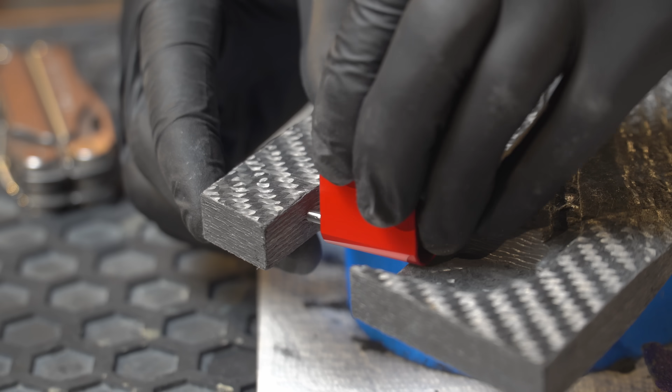The control tabs are made of anodized aluminum and they're driven by MKS 6160 high-torque servos. These slim servos are embedded inside the fin, which is made of solid carbon fiber. The pockets are then potted in epoxy to smooth out the outer mold line, and then the fins are attached and filleted to the body tube.

The fins were cut out using the Carbide 3D Shapeoko router, but before we get into more details, this video is the beginning of No Effort November, a month during which I put no effort into making videos. I got this idea from Technology Connections, one of my favorite channels, and I think it's a great reminder that you can put whatever you want on this platform.

And what I want to put on this platform is a long technical deep dive into how I made this rocket airframe. So let's start at the beginning.

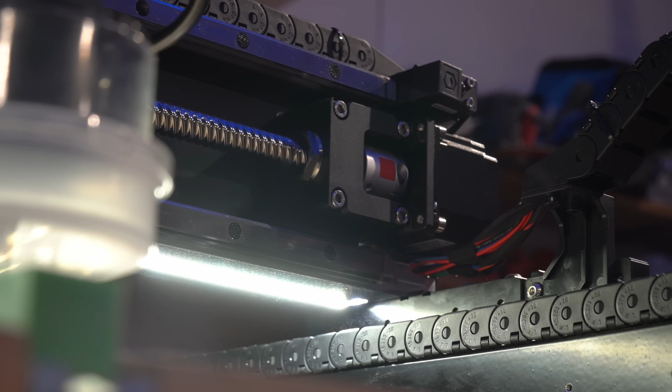Before cutting the fins out in carbon fiber, I started with wood, specifically birch because it's so cheap. The carbon fiber that the fins will eventually be made of is very expensive for reasons we'll cover later, and birch provides a great way to test out my tool paths.

The path uses 2D adaptive clearing for the servo pockets and shallow contour passes for everything else. On the first test cut, I included the leading edge chamfer on one side, but this presents a problem. How do we get the chamfer on the other side of the fin?

My initial plan was to mill all 4 fins at once, flip the entire stock material upside down, re-index it, and then mill the other side. But then my buddy Winston Moy had a better idea.

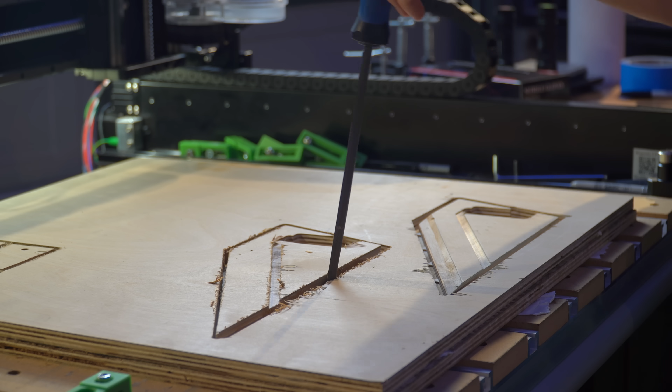I cut out the fin using the same strategies as before, but left off the leading edge chamfer. On the other side of the machine, I set up a fence and indexed the fin against it using a piece of stock material as a spacer. This should let us get consistent x-axis placement, which is important to determining where the leading edge chamfer is.

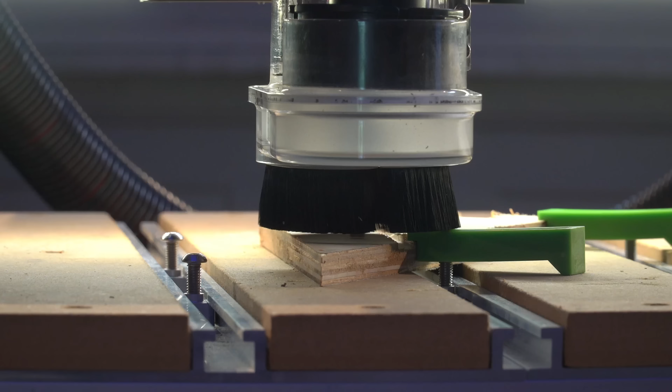Then I ran a parallel tool path to create that chamfer and flipped the fin to do the other side using the same path. This creates a consistent chamfer across any fin that we align to this fence.

With the tool paths complete, you'd think it'd be time to make the fins, but it's not. It's time to test the servos.

The servos I'm using here are MKS 6160s. For the amount of torque they put out, these things are relatively slim, and they're designed this way to fit inside the wing of a UAV, which we're kind of doing. Like, in a sense, a rocket is a UAV, and in a sense, a fin is a wing.

The servos claim they can do 18.6 kilograms per centimeter of torque, which is a ridiculous measurement for torque, but let's just roll with it. 18.6 is an impressive claim. The distance between the center spline and the actuation point is about 9 millimeters.

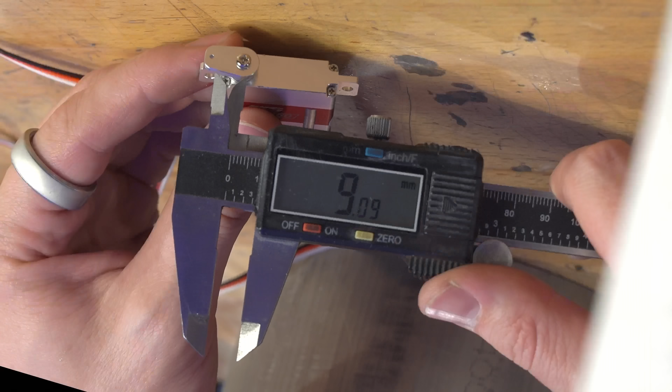Mounting this servo in a vise with a crane scale and some ratchet straps, I set about to find out if that was true. I would like to learn 2 things: 1, what is the maximum torque of the servo? And 2, when we exceed that max torque, what happens?

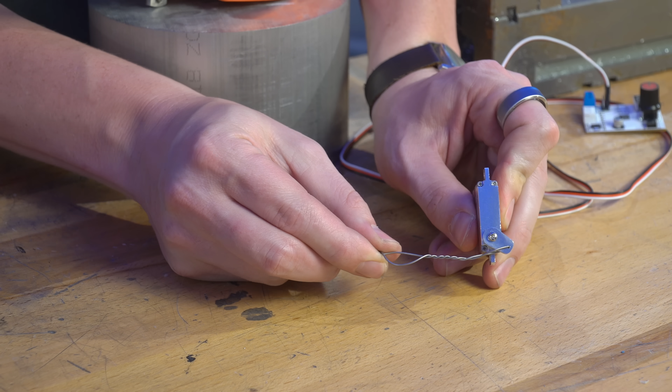Is this test a little overkill? No. Usually I'd say yes, but absolutely not. We're putting 40 pounds of rocket propellant into this thing. It is an enormous vehicle. It is fully guiding itself. It needs to be fully in control, and we're trying to prove out tech for the space shot. I need to be doing this at the level of risk tolerance that I'm going to be using for an 8-inch rocket. For what it's worth, a 4-inch rocket will kill me just as good as an 8-inch. I mean, you can get killed by an Estes-like park flyer, but the secret goal of the meat rocket is to show that I'm ready to build something much larger.

So let's test this thing. With the initial testing, I held the servo down at its center point and started ratcheting down the ratchet strap. I was able to get some pretty incredible values for this.

The units on the crane scale are in newtons, and it got to the point where the force started unwinding the steel cable attached to the servo. With this style of testing, I found the maximum resistance to be somewhere around 650 newtons.

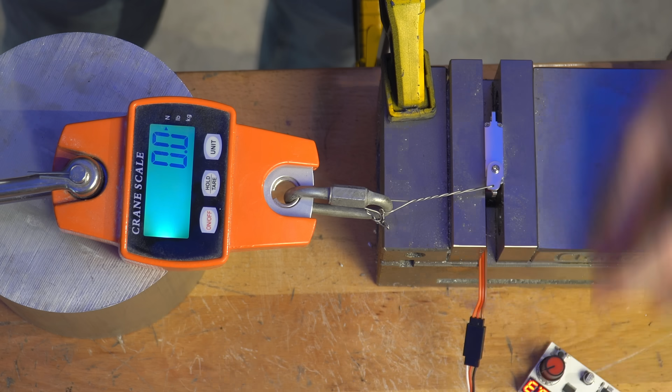So it will really hold that position for a long time. And if I let it go, it does seem to lose a little position. Like, that is not the center I was looking for. This is almost 60 kilogram-centimeters, which way outperforms the spec.

But the servo clearly slips during this process, and it seems like what I'm actually doing here is just bending the metal of the gear train itself. Eventually, when I tried pulling again, I did strip the gear train entirely. Oh, that broke something. Yeah, there we go.

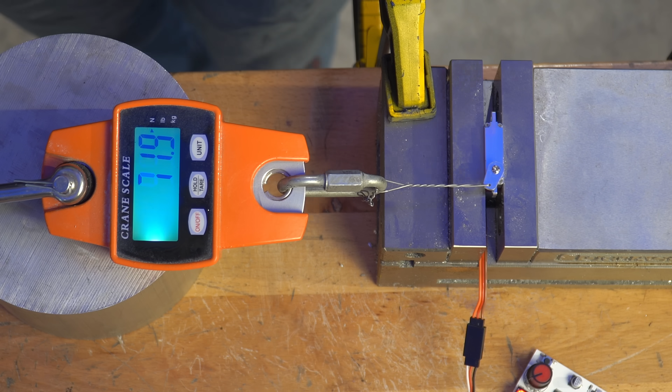I then ran testing where I attempted to move the servo under load. This yielded some less encouraging results. The servo can withstand enormous static load, far beyond the spec, but I did notice that when trying to move the servo under load, I was getting below the spec. The numbers I was getting were somewhere closer to 11 kilogram-centimeters instead of 18.6, which is a stark difference.

All right, gang, new idea just dropped. This is like a shaker.

Sometimes we desire more performance out of our devices than they are willing to give us, and they need a little convincing. Sometimes that convincing comes in the form of more volts. The servo I am using is rated to 8.4 volts. That's a 2-cell LiPo. This is a 3-cell LiPo, which brings us up to 11.1. That's higher than the servo wants to be at.

And yes, I hear you asking, Joe, do you really think it's a good idea to overvolt your servos in such a high-stakes environment? To which I would say, shut up. Let me make this mistake. I know it's not a great idea, but consider the following. I really want to do it.

All right, let's feed this 11 volts and see what happens. 231, 211, 200. Servo's a little hot. Wow, dude, the overvolting is great. This is excellent. What could possibly go wrong?

The servo didn't die using 3 cells, so naturally, because we're testing to failure here, I went up to 4 cells. 217. Oh, that's it. There's the smoke. The servo did not like 4 cells, which makes sense given that's double the rated voltage.

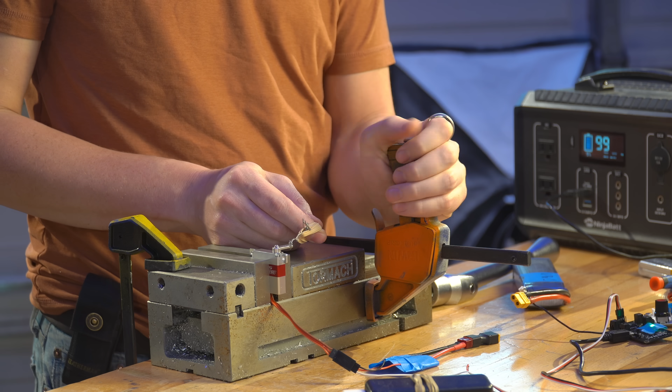The next test I ran was a runtime test. Using a program on an old single-board computer, I drove the servo back and forth under a little bit of load from a rubber band for as long as it would go for. Using the overvolted 3-cell method, I was only able to get about 4 minutes of life out of the servo before it started slipping and dying, and when I ran the servo at the proper voltage, I was able to get about 17 or 18 minutes before the servo died.

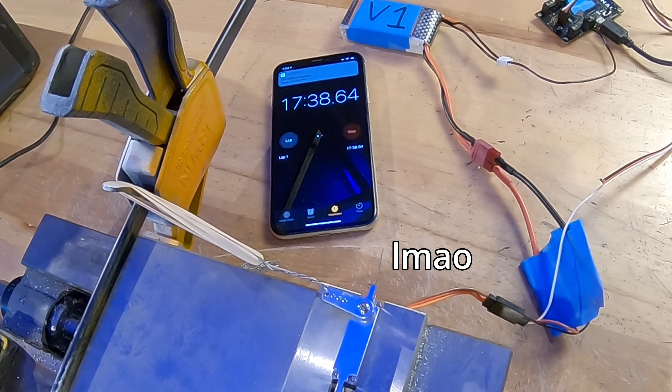This prompted me to do one of my favorite things, which is cold call the company I'm interested in. I found a customer support number for MKS servos and spent a little while on the phone with them. When I asked them why their servos weren't delivering the stated torque on the packaging, they said something to the effect of, 'What are you gonna do? We gotta sell servos.' And it's like, what are you gonna do? Don't lie about the torque.

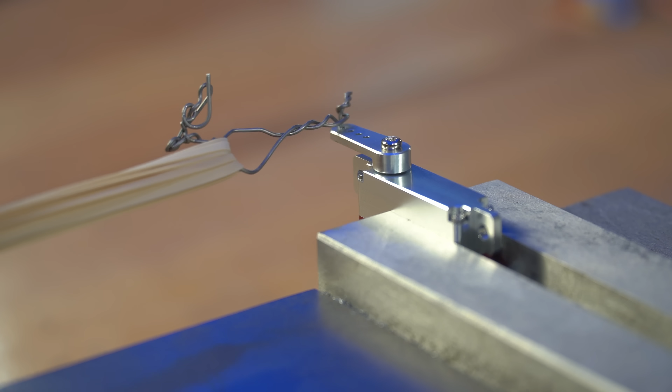For what it's worth, they were really nice on the phone, and the call yielded a much more detailed spec sheet that gave me an idea of where and how I can expect the servos to fail over time.

With a coreless servo like this, heat is going to be the thing that kills it, specifically heat within the motor. So constantly cycling it back and forth has a pretty high chance of burning it out, but intermittent movement or movement over the course of a flight profile like I'm going to do shouldn't be a problem.

All that information is good enough for me to move forward here. In flight, we're going to operate with 2 cells like the servo wants, and we'll design the control system such that it doesn't demand more torque than the servo can actually do, not what it states on the package.

I want to press pause here and back up a little bit. I haven't talked much about the fin tab sizing, the nose cone shape, any of the GNC analysis, and all of that is really heavy simulation work, specifically stuff with CFD, or fluid dynamic simulation.

Up until now, I've been doing that simulation on an old laptop from 2020, and this approach works great if you don't have deadlines and don't care that it takes multiple hours to run a single sim.

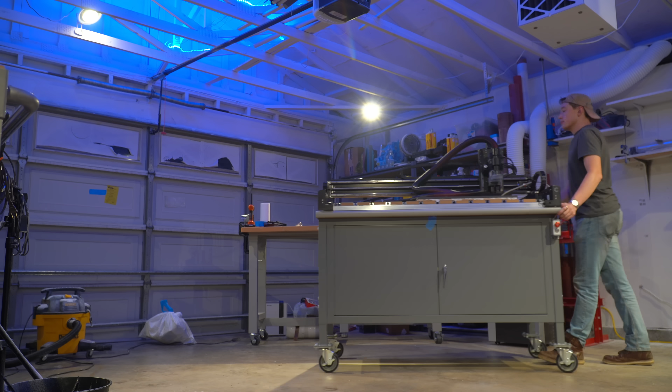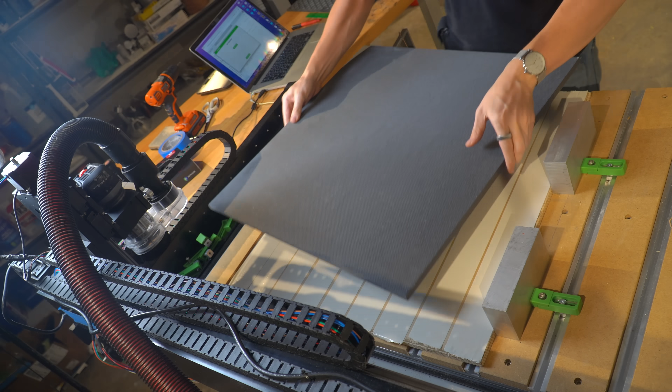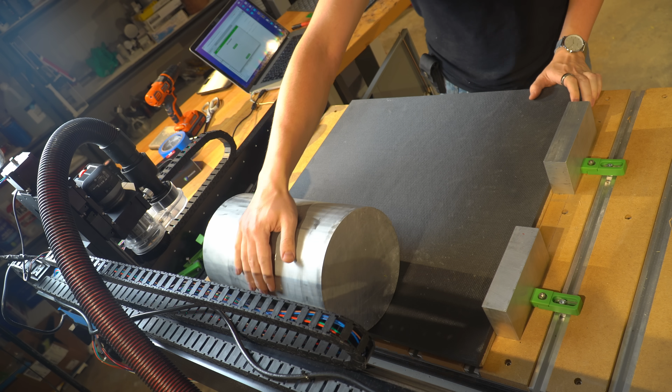With the servos done, it's time to cut out these fins. I secured the stock material to the table using X-Fasten double-sided woodworking tape. I used a birch wasteboard under the carbon fiber and smoothed it out using this comically large 8-inch piece of stock material, and the carbon fiber goes on top using the same double-sided tape method. This stuff is half-inch thick, quasi-isotropic DragonPlate. DragonPlate is expensive, but it is really good. I could have laid up my own carbon fiber sheets for this, but I opted not to because I want the absolute best chance that these fins don't flutter themselves to pieces at Mach 3. There's a lot of unsupported area near the servo, and unfortunately, an $800 sheet of carbon fiber is kind of a drop in the bucket for a project like this. The sheet is also quasi-isotropic, which means they put the layers down in alternating directions, and that helps with strength overall.

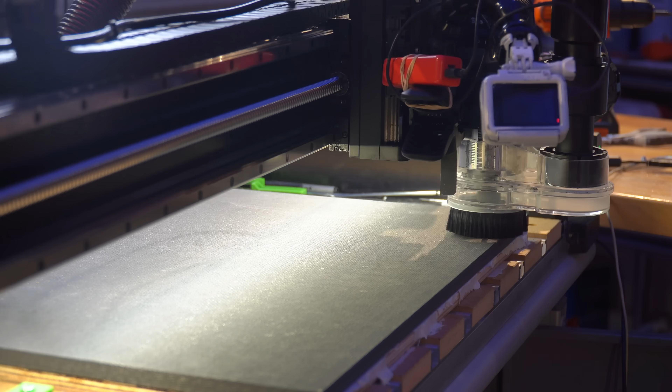Carbon fiber is worse for you than asbestos. It's so bad, so I'm using a HEPA filter bag in the shop vac, and the CNC machine has a dust boot on it to make sure that it sucks up as much as possible. But in addition, I'm also wearing a respirator and eye protection and usually some form of gloves as well. The dust here is so bad for you that some people cut carbon fiber underwater. I'm not going that far. The dust boot and a HEPA filter and a respirator and eye protection is probably enough, but you don't want to breathe it in.

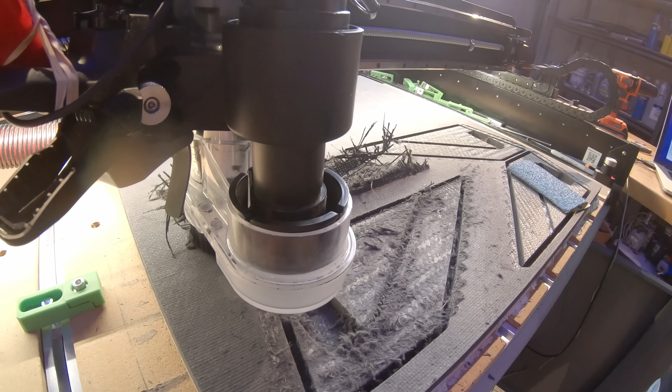I'm cutting this using a flat carbide quarter-inch end mill. With carbon fiber, you should really be using diamond tip stuff, something that will maintain its sharpness, because carbon fiber wears it down quite fast. I did buy the right cutter for this, but it did not show up in time and I was getting impatient, so I cut the fins this way. The wear on the tool over time becomes clear. The first fin cuts out all right with a little bit of fraying. The second fin gets much more fraying on the contouring pass. And by the third and fourth fin, the tool is doing a lot more ripping and a lot less cutting. The final shape comes out just fine, and a lot of the frayed area can be fixed with a little bit of sandpaper, but if you're wondering why this looks disgusting, that's why. Exactly like the birch version, these fins were indexed against the fence using a piece of stock material, and then a parallel toolpath was used to create the chamfer.

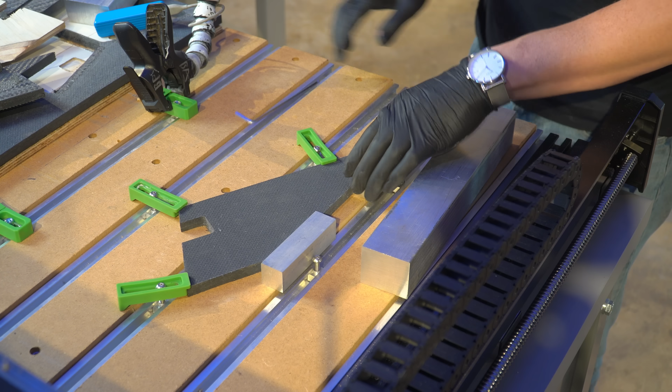In hindsight, it might have been better to start the toolpath on the edge of the fin rather than from the top. Any good machinist knows that cutting with the side of the tool is always better than cutting with the bottom, and with each pass I was essentially plunging it down into the stock material. This resulted in a kind of horrifying and comedic fraying.

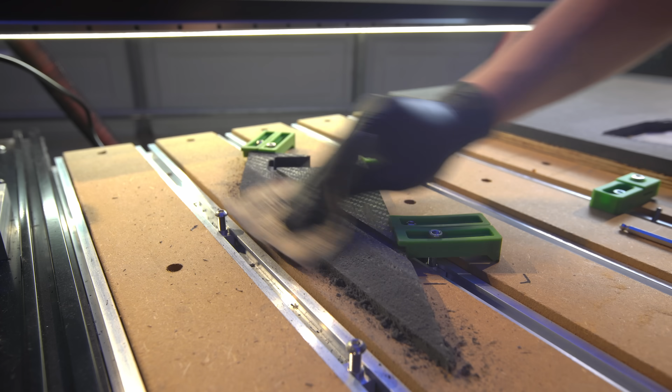Just as with the birch, the fins came out fine, but they needed a little sanding to look good at the end. The fins are not identical, by the way. They're made in pairs. In theory, the servos create a little asymmetry, even when potted in epoxy, on the final surface. By making these fins in opposing pairs, any asymmetries we create with the cutouts should be cancelled out by the opposite pair of fins.

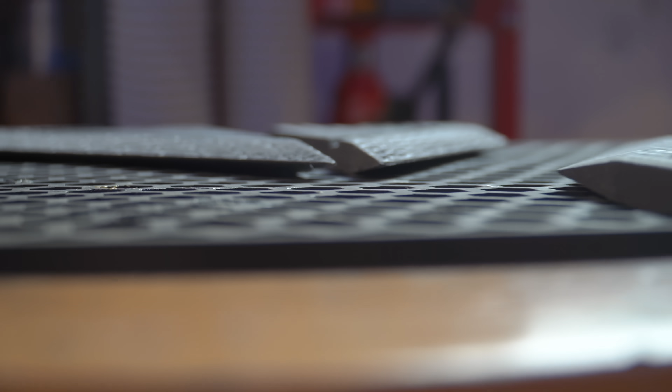In practice, I'm not sure this matters that much. There are asymmetries all over the vehicle that are probably more significant than the fins, but I have the option to make them this way, so why not try to minimize that where we can?

In my concern about the stiffness that's lost in the fin by the servos, I took an interesting little detour. I took apart one of the dead servos and tried to etch the aluminum surface that wasn't seemingly anodized. In hindsight, I think all of the surfaces are anodized on this servo, it's just that this one section has red coloring.

My goal here was to create a better surface for the epoxy to bond to. Anyone working with aluminum should know that the oxidation layer on the surface can make it really bad to bond with. So after chemically etching the surface, I put it in an alodine solution for a while. This turns the parts a beautiful gold color, and it probably did increase the ability to bond epoxy to the surface of the servo, but since they're already anodized, which it seemed like from the etching behavior, and for the amount of complexity and headache it was to actually get this right and reassemble the servo, it did not seem worth doing.

The servo gets embedded into the fin using epoxy. There's no hope for serviceability here. If the servo dies, it dies and the whole fin dies, and if it's attached to the vehicle, the whole vehicle dies. At a larger scale, it'd be nice to prioritize serviceability, but serviceability at this scale comes at the cost of stiffness in the fin. I want epoxy or some type of structural material in every part of this fin that I can get it.

We must remember, as we do this project, Mach 3 got hands. There's also something to be said for the complexity involved in trying to machine access hatches for every part of this fin. At some point, you just test the servos as good as you can, and you send it.

To make sure I had this process down, I attached a dead servo to a 3D printed control tab and put it in the birch fin. I'm really glad I did this. This is an extremely nerve-wracking process because if you get it wrong, you ruin the whole fin. So having a practice run was a good idea.

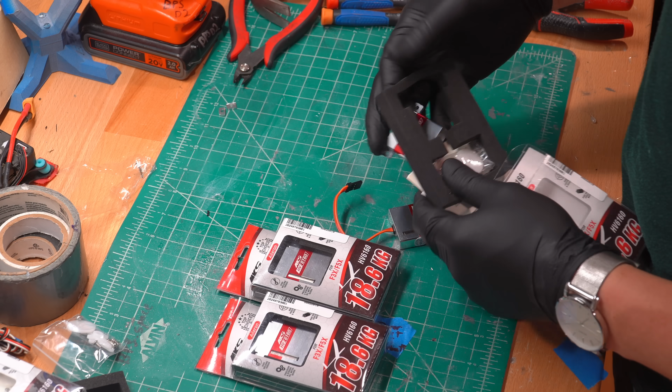For the flight servos, I bought 6 total and selected the 4 best ones as far as I could tell. I tested each servo thoroughly and picked the ones that seemed to have the fastest or most consistent response. I chopped off the mounting points too. We don't need these here since we're using all this epoxy.

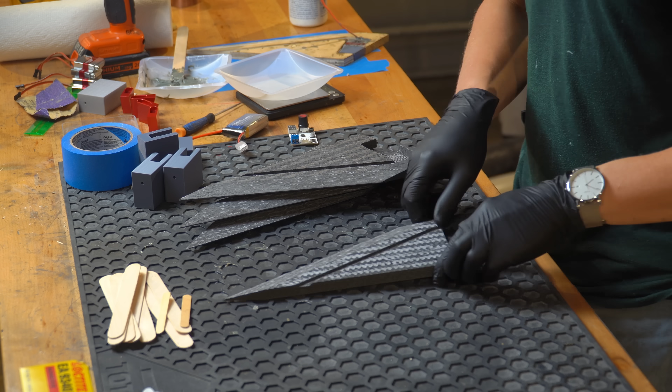The servos themselves can't support all the aerodynamic forces involved, so the tabs are also pinned on the other side with an 1/8-inch stainless steel dowel. I drilled the hole in the base fins using a 3D printed guide that I designed. This worked okay. It wasn't great. The drill bit can travel and weave a little bit inside the carbon fiber, so I'll have to come up with something better in the future. Glad I tested it though.

It just means the whole process is kind of stressful. There's a lot of things that can go wrong, and I think some 3D printed jigs and a little prevention for the epoxy getting everywhere could fix this in the future.

Traditional razor blades ended up being pretty good spacers to keep the control tab from bumping against either side of the carbon fiber. Once everything had cured here, it's time to run some extension cables.

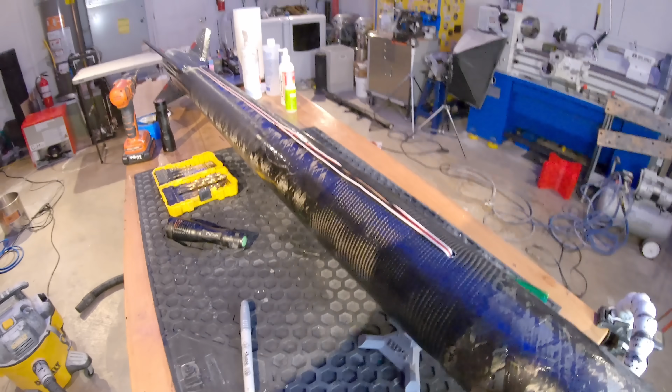The PWM extension needs to run all the way up the vehicle, but we'll start with just one length of it. Here's a little bit of foreshadowing.

At every step of the way, I'm plugging in the servo to make sure things still work. At any point, if things stop working, we're totally hosed. These servos are epoxied in, which means they stay in there forever.

I'm soldering the extension directly to the servo cable. There's no need for a connector here, and the connector just wastes valuable space.

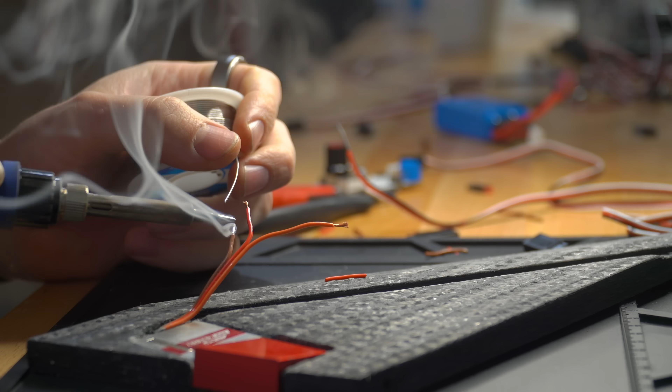Much like I did during the roll control testing this spring, I'm staggering the connections for each wire in the cable so we don't need to insulate them. It's a little finicky to get all three joints to line up this way. Sometimes there's a little slop in there, but for the size of the raceway they have to run through, it's totally fine.

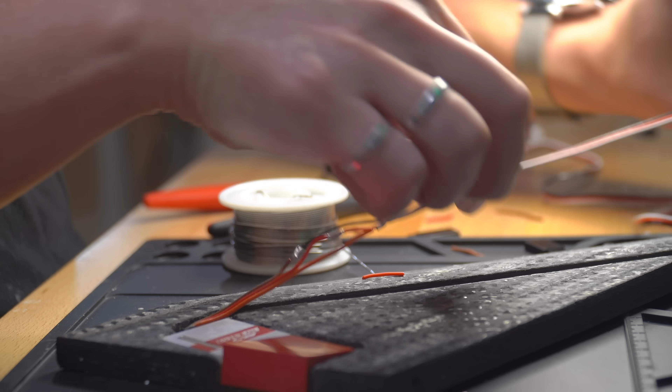Before potting all this in epoxy, I CA'd the servo cables in place. This ensures they stay below the outer mold line of the fin, and that they don't try to pop up during the epoxying process. I also tossed small pieces of aluminum tape across the exposed motor section.

The very aft of the motor has a little bit of a hole in it, and I was worried that epoxy might be able to seep into the motor itself. As before, with the servo leads connected and CA'd in, I tested each fin.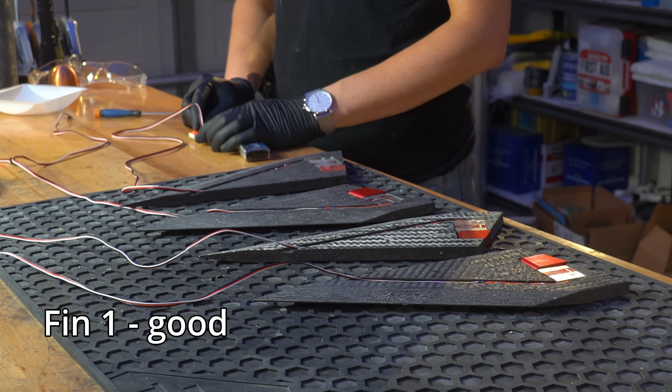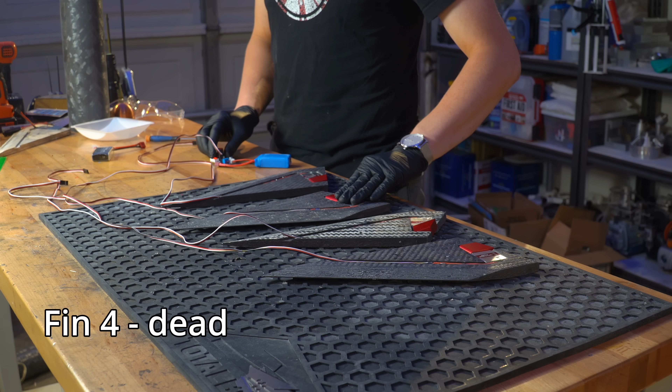That's fine. And that's not. Is this dead? What's happening? Do you think it's the tape?

Initially, I thought it was the aluminum tape doing something weird between the grounding of the motor and the aluminum frame of the servo, but that doesn't really pass a smell test since they should all be grounded the same.

Oh, this is so bad. What's happening?

Oh my god! I think I might actually be stupid. Carbon fiber is conductive. I'm actually stupid.

Okay, the connection between the servo cable and the extension cable is unshielded. This was fine in the roll control testing I was doing earlier this year, but it's not fine here. The earlier test flights had PLA fins, so they were non-conductive, and as long as you staggered the joint between the three wires, it was pretty much guaranteed you were not going to get an electrical short.

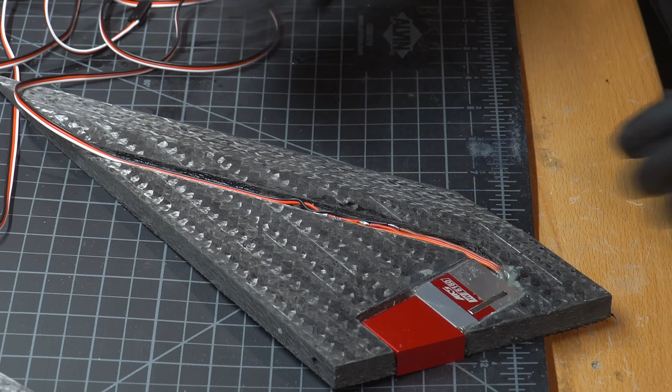But with this, if two exposed leads are connected to the carbon fiber, they will short out. And indeed, that's what happened. I'll show you. Hold on. Hear this?

That's conductivity across the whole fin. The whole fin can conduct electricity through it. This is actually true of the body tube, by the way, so we'll have to be careful running cables up that raceway as well, but we'll burn that bridge when we get there.

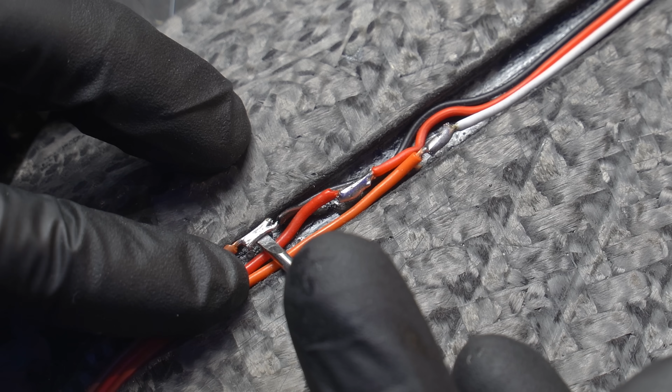To fix this, all I had to do was pry each exposed lead up and then pot it using CA. Thankfully, I had only used a pretty light amount to hold the cables down, so it wasn't too hard to do. I used a CA accelerant to speed up the process, and when I was done, I tested all four fins, and all four passed.

Oh my gosh, we're so back, dude. Cool. Wow. Dude, this is such a near miss.

This is crazy. With the extensions in and the servos tested, it's time to pot them all in epoxy. For this, I'm using Loctite E120HP. It's a less viscous epoxy than the 9340, which means it will flow really well into these crevices. Inspired by the epoxy queen herself, Xyla Foxlin, I used a little bit of red dye in there too.

There might still be some bubbles in here, so since the fins are small enough, I put them inside the propellant bowl and pulled vacuum. Doing this gave me pretty high confidence that we had filled this entire channel with epoxy, crevices and all.

After leaving the epoxy for an hour to begin the hardening process, once it was thick enough, I used a knife blade to make sure the epoxy was flat against the surface. You have to go pretty slow on this process to make sure the epoxy has a chance to backfill behind the blade. So a lot of these shots are kind of time-lapse, but the result is really nice.

Now that the servos, control tabs, extensions, and epoxy is all in on these fins, the fins themselves should be about done, and we need to attach them to the vehicle next.

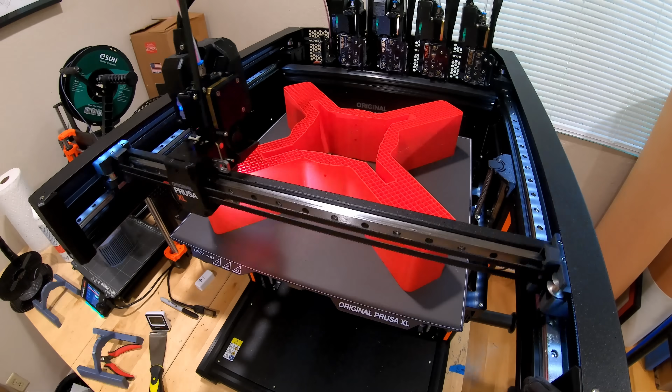Even though we have a control system, it's still important that these fins go on straight, so I printed the world's largest fin jig. I did this using the Prusa XL, kindly provided by Prusa with lots of Prusament, and I went fairly slow with it, so it took about 2 days to complete the print.

Using Onshape, I can show you a little bit more about how this works. The fin jig almost identically conforms to the exact shape of the fins, and we can be pretty sure about this because we cut the fins on a CNC machine. Because of this chamfer here, as I push the fin down, it should be pushed against the airframe, and that'll be our primary mechanism for making sure the bond line is pretty tight. The fin jig also has lots of screw holes for attaching it and holding it to the airframe itself, and it has small reliefs near the base so that any excess epoxy that squeezes out doesn't attach the fin jig to the rocket itself.

I'm just going to put some superfluous shots of these fins in here. The carbon fiber with the red epoxy with the servo and red control tab looks so cool together, and I'm really proud of how these came out. I've had the idea to embed this servo into these thick fins for a long time now, and it's so cool to see it come to life.

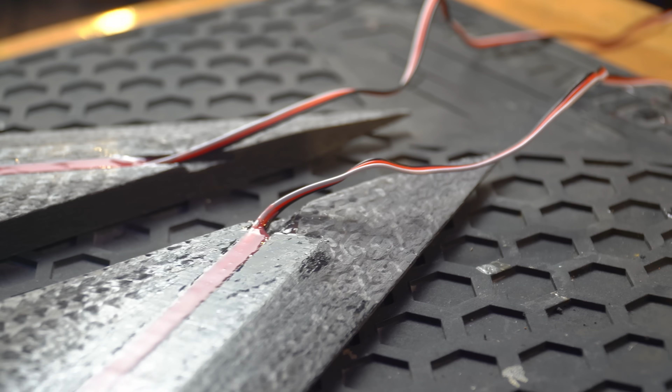Not to tempt fate, but I'm also kind of shocked that nothing has gone wrong so far. Every epoxy operation is basically an opportunity to get something catastrophically wrong, and so far, so good.

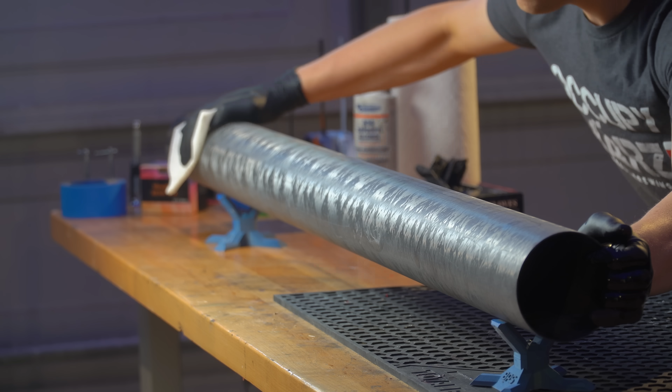The airframe for the meat rocket is a 60-inch carbon fiber tube. The tube is wound and then centerless ground down to a precise outer diameter, and the thickness of the wall is pretty thin at about 1.5 millimeters, which we're going to talk about later. I use solvents like acetone and IPA to make sure that the outer surface is clean. We're going to do sanding on the areas where the fins attach to ensure even higher strength, but generally speaking, the whole tube should be clean too.

After a test fit in the fin jig, I identified which fins I was most proud of and which fins I was least proud of. The best looking fins get an F for front, the worst looking fins get a B for back. When this thing is on the launch pad, I want those good looking fins to be out front.

Safety is a recurring theme here. Anytime I'm working with carbon fiber, anything that can create dust, I'm wearing a respirator and eye protection. And when it's an option, I also turn on an air handler in the garage to slowly decontaminate the space.

Here, I'm using 60 grit sandpaper to prep the root chord with some thick gloves to prevent any oils on my hands from getting on the surface. And I'm doing the same on the tube as well.

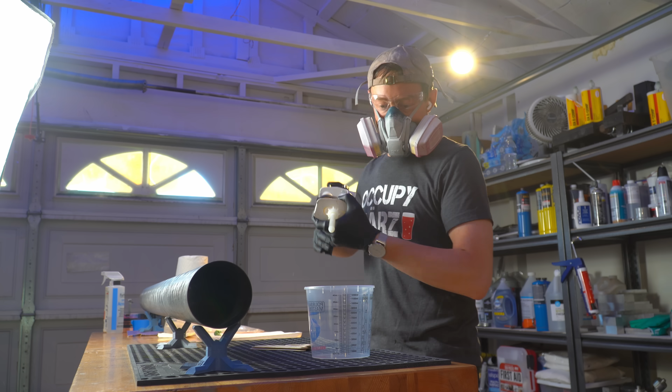The fins are going to be bonded to the body using Loctite E120HP epoxy, and even though it's going through this mixer tube, I always mix a little extra just to make sure it's homogeneous. With a few drops of black dye and a little bit of time in the vacuum chamber to get rid of those bubbles, we are ready to attach these fins.

I first coated the surfaces where I wanted the fins to go and then attached the fin jig by lightly screwing down on each side. You certainly don't want to go too much on this because you can damage the airframe itself.

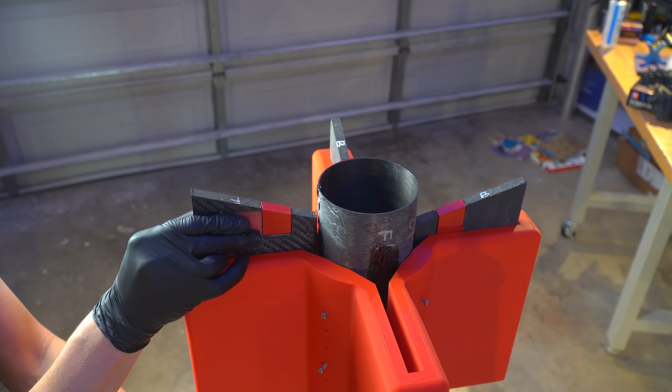The fins get the same treatment with coating of the E120HP on the root chord, and it's good to do it this way to ensure that the epoxy really gets into all those little cracks. Once the fins were placed in the jig, I was able to loosen it and move it around just a bit. My goal here is to keep the tips of the fin slightly forward of the aft of the tube. The thought is that whenever I stand the rocket up, if I'm working on it, I want it to be resting on the base of the tube and not on the fins.

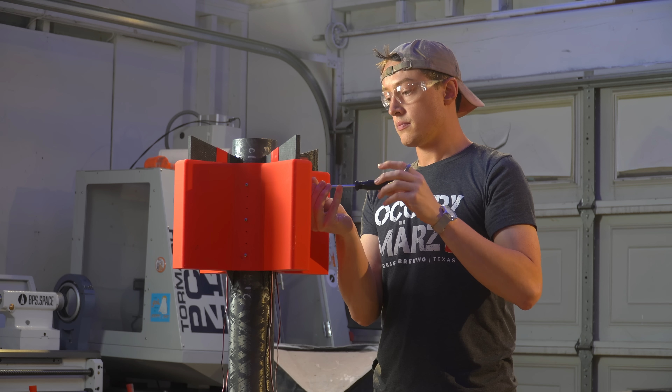This protects the trailing edges, and the increased bond area should help us keep the fins attached if we have a hard landing. As the fins were curing to the airframe, I started a print on the Prusa XL for some filleting tools. Once the fins had cured, I was able to pull the jig off, and the final product was excellent. The rocket is eventually going to be painted white, but the red with the black carbon fiber is such a cool look.

The next step in this process is filleting the fins. The root bond is pretty strong, but it's not strong enough to survive Mach 3. Creating fillets at the base of each joint helps provide extra stiffness and extra strength in flight.

The first step to any epoxy operation is, of course, bond prep, which I'm doing using 60 grit sandpaper, and the epoxy is going to be Loctite E120HP with some black dye. E120HP, as previously discussed, is a very thin epoxy, so it makes it kind of difficult to use for fillets. The ultimate structural properties of the epoxy are phenomenal, which is why I've selected it for this task, but it does require some technique to get it right.

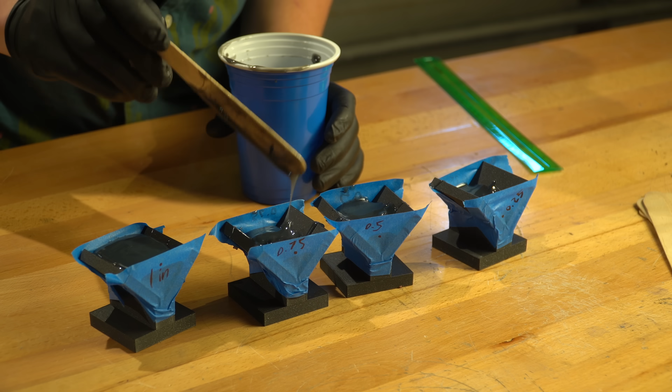In order to get this technique right without messing up the actual flight vehicle, I did lots of testing beforehand. Several months ago, I began this testing with small 3D printed molds. The goal of each mold was to assess how fast the epoxy would exotherm and when the ideal point to pull the epoxy was. When you pour the epoxy, it is quite thin, but eventually it thickens up, and somewhere in between that time is a Goldilocks zone where pulling the fillet will make sure it maintains its shape instead of slumping back into a chamfer more than a fillet.

Getting this right can be pretty tricky, so I also experimented with some other approaches. At a larger scale than these 3D prints, I used one of the old fin cans from Luminaire to test fillet making. On this first test, I used about 1% Kevlar pulp mixed into the epoxy. This did thicken it up considerably, and after about 30 or 40 minutes, I was able to pull a pretty good fillet with a consistent shape, but the surface finish left a little bit to be desired.

I'd love to get a smooth surface without sanding, so I reduced the amount of Kevlar pulp to about 0.5%. The surface on this was still a little more bumpy than I would like, so I ditched the Kevlar altogether and focused on getting the timing right. Using pure Loctite E120HP with a little bit of different colored dye each time, and with the addition of a thermal camera to monitor the runaway of the epoxy itself, I found that it took roughly an hour from the start of the mixing to get the consistency that I wanted for the fillet to maintain its shape.

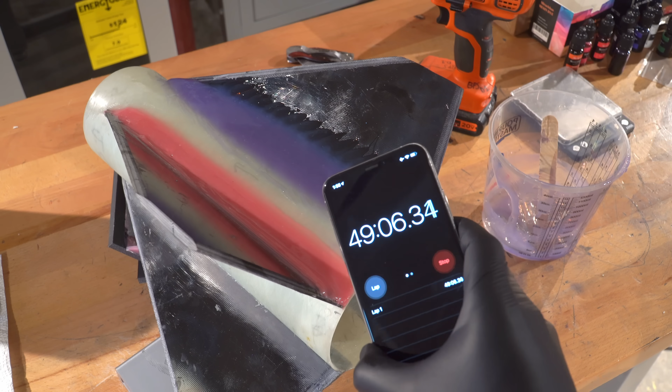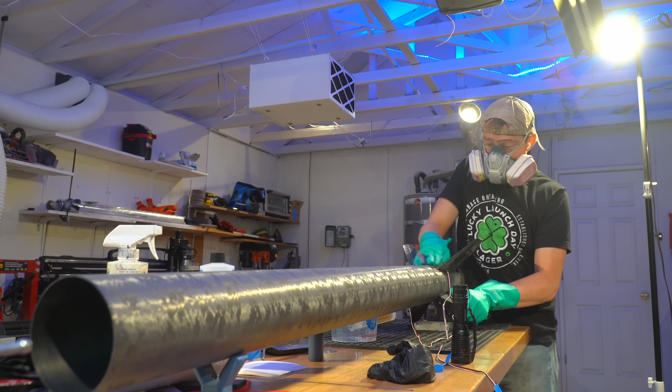I'm handling this rocket quite a bit, sometimes without gloves, and contrary to popular belief, carbon fiber does not belong in your skin. So I took the excess E120HP and just started spreading it around on the fin. My goal was to create a thin sealant layer on top of the carbon fiber, and I did achieve this, although it really should have been done with laminating epoxy. The final result got me where I wanted to go, but it created a lot of pock marks on the side of the fin, which will ultimately hurt our max speed and apogee.

After waiting about an hour, I pulled the fillets. I designed these little fillet tools and printed them out on the Prusa. They should create about a 1.5-inch radius on the fillet, and they also conform a bit to the airframe itself, which should help clean up the excess epoxy.

One thing I found is that the servo cables really wanted to float to the surface of the fillet. This is kind of a problem considering that the cables at Mach 3 are not going to be super happy. Once the epoxy had thickened more, I was able to push the cable inward so it was less of a problem, and on the other fins, I CA'd the cables to the surface first before filleting.

The E120 HP is thin enough that I had to separate the rocket into quadrants and only do one set of fillets at a time. Each time I poured the epoxy onto the fin, I tried as much as possible to reduce fold over.

This is a problem both with epoxy and with the propellant that I make. When a liquid folds over on itself, it doesn't always do so flat. It can often entrap air bubbles, and any air bubbles are bad for the propellant structurally and for burning, and they're also bad for epoxy for the same reasons. Well, I guess not for burning, but... So anyway, when pouring this epoxy on, I'm trying to reduce fold over as much as possible.

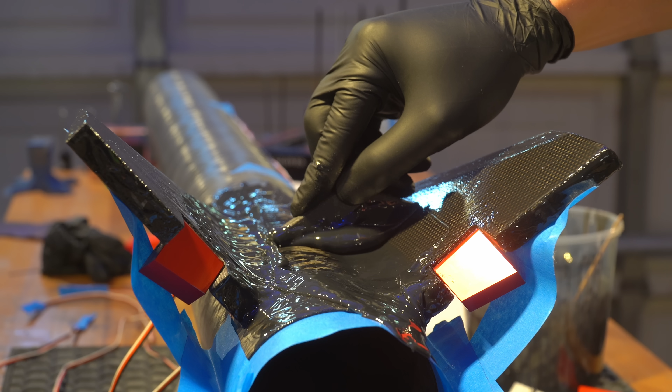Some of these fins did require multiple fillet pulls. Thankfully the epoxy is pretty easy to work with, so you can always add a little bit extra and pull it again if you don't get it right. With each set of fins, I also coated the entire surface just like I did for the first set. We're just looking for a really thin layer to seal those carbon fibers in there. It's mostly for handling of the rocket and not for any aerodynamic reason.

All sanding is done with 60 grit sandpaper here, and if you want to learn more about sanding and surface preparation, oh boy, I have some great news for you.

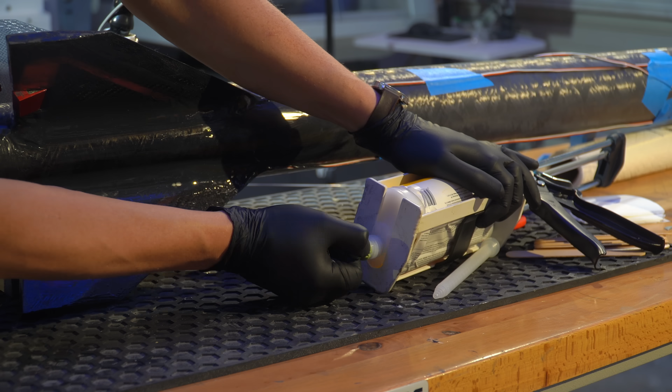One great thing about the E120 HP is that they sell it in these cartridges. I'm using quite a lot of epoxy across this entire project, and the cartridge with a little mixing tube makes that much easier. For any given epoxy operation, I just put one of these expendable tubes on there. It mixes it for the most part, and I don't have to measure out my own ingredients.

Even though I'm mixing further after it goes through the mix nozzle, I did find that the mix nozzle itself, in my composite bond testing, was like 90% of the effectiveness. So in that little distance that it travels, it mixes pretty well.

Once all of the fillets on the fins were done and cured, I did the same thing I've been doing every step of the way here, which is that I tested each one of the servos to make sure the fins still worked. And with that test passed, it's time to talk about structural integrity.

Whether you're a human or a rocket, having integrity is important. If you're a human, maybe that means sticking to your word when you say you'll do something. And if you're a rocket, maybe that means you don't fall apart at Mach 3 like you're designed not to.

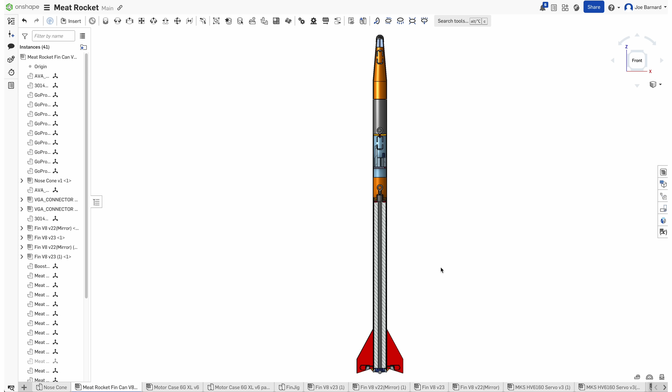Here's the problem at hand. Between the end of the rocket motor case and the beginning of the upper section of the rocket, there's a lot of unsupported area. That unsupported area is that 1.5 millimeter thick wall. Granted, this is carbon fiber, but we're also going to 3 times the speed of sound, and the dynamic pressure on that blunt tip nose cone is going to be considerable, like capital C considerable.

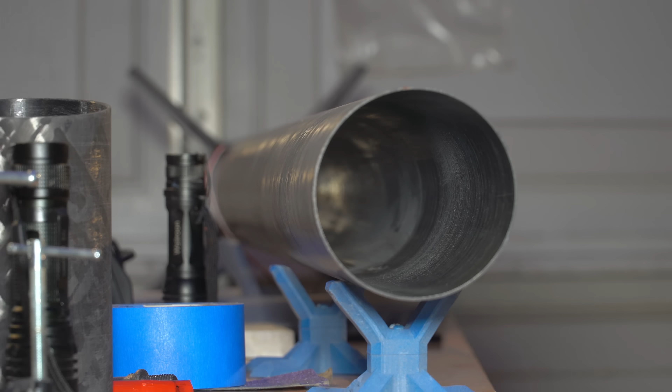So like the vibe-o-meter on 1.5 millimeters too thin is just, the vibes are not great. So here's what I did to fix that.

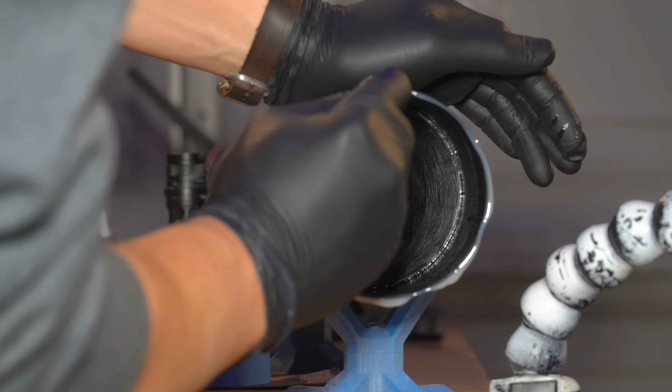I took a section of coupler tubing and bond prepped the whole surface. Then I did the same for the inside of the upper section of the airframe. After coating both surfaces in E120HP, I added a bit of coupler tubing to stay forward of the motor section. This leaves a little room for the coupler of the upper section to fit in, but it improves the structural integrity above the forward closure for the motor.

Unfortunately, this still leaves a little bit of a gap between the supported motor section and the supported upper coupler section. That gap is so tiny it probably doesn't matter, but I'm so terrified that this thing is going to fall apart. I've never sent anything to Mach 3, well, okay.

I've never sent anything to Mach 3 and had it survive, let me put it that way. For that reason, I rolled out a sheet of carbon fiber weave and decided to do a small layup on the outside of the rocket to bridge the gap between the forward closure of the motor and the coupler stiffened section. I used 2 layers of carbon fiber, one at 90 degrees, one at 45, and cut out a top layer of 2-ounce fiberglass to smooth out the surface so I don't have to sand as much.

The epoxy I'm using is Fibre Glast System 2000 with the 2060 hardener. This is the same epoxy I used for a lot of the Lumineer stuff, which means it's been thermal cycling in my garage for about 3 years now, and it smells like it. If you need a reminder, it used to be this color, and now it's this color. I don't know how much the strength of the epoxy has changed, but it seems to work fine. To make it super clear, if I were making a crewed vehicle, I would not use expired epoxy.

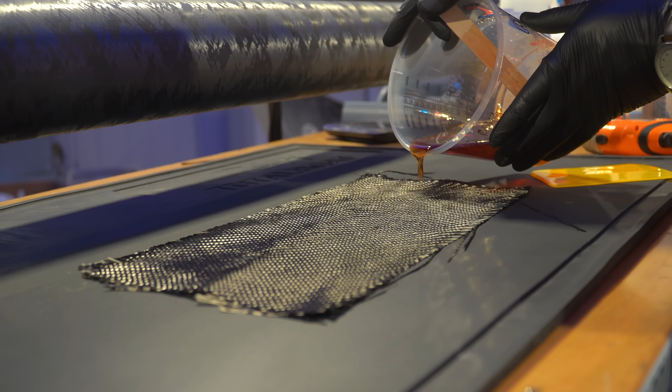Okay, moving on. After degassing, I infused it into the carbon fiber weave using a little squeegee thing. In composites manufacturing, it's critical to get the right ratio of epoxy to the weave. That means that for most of these layers, after infusing lots of epoxy into it, I squeegee it out so that there's just the minimum amount involved in the weave itself. Even though there's 3 layers of composite here, it did end up pretty thin, and the transition between each of the 3 layers is pretty smooth. So actually, once this thing is painted, you shouldn't be able to notice the transition that much.

The next step we're going to take is running the raceways up the side of the vehicle. This involves taking these PWM cables, running them up the side, and protecting them against the Mach 3 airstream. Much like the servos, this leaves no opportunity for serviceability because at this scale, it's more valuable that I just pot them in epoxy, make sure they work first, but keep them safe in epoxy forever.

The epoxy here is Loctite E120HP with a bunch of thermocells added, I think somewhere around 20%. This thickens the epoxy to a point where it should be able to form a pretty good raceway, and I was able to print out raceway forming tools on the Prusa machines. These tools are designed such that they should be able to just about cover the PWM cable and leave a little bit of epoxy on the surface.

It took a few tries on a practice tube to get this technique to work before I was comfortable doing it for the full vehicle. And eventually, much like the fillets, I found that waiting about 40 minutes to an hour before actually doing the pull on the epoxy was pretty important to helping the epoxy maintain its shape.

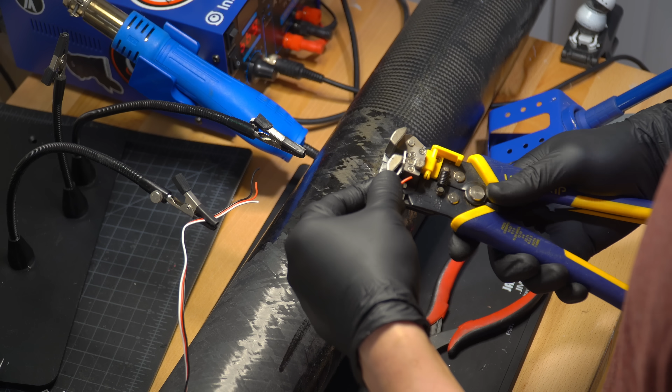And with the test sections done, it's time to attach another PWM extension. Just like before, I'm staggering the connection here to make sure the electrical leads can't make contact with each other. And to minimize the amount of work I have to do on this, I'm running 2 leads per raceway. In an ideal world, we could do all the leads down one raceway. That would be the least draggy solution.

However, as the vehicle gains some angle of attack, that one raceway becomes a really big roll control surface, and it can spin the vehicle. So what we want is symmetry.

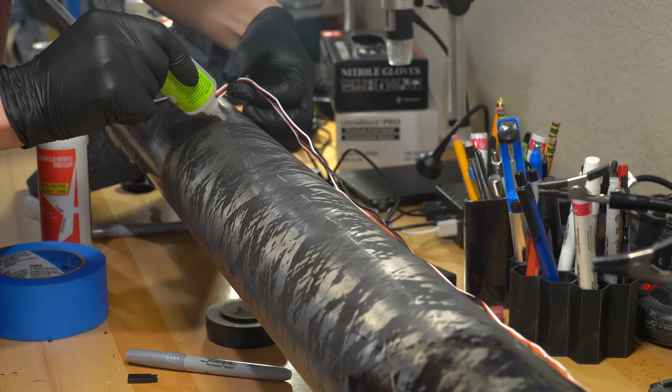Learning from my mistakes in the past, I used electrical tape to prevent the exposed leads from touching and then shorting against the carbon fiber airframe. I then tacked down the leads using CA and a little bit of accelerant, and as always, I was constantly checking whether the servos were still working through the whole process.

Before running the raceway, we also have to pop the cables inside the vehicle. We can't do this lower down on the airframe because it's occupied by that motor. This is a minimum diameter rocket, which means the only way for this rocket to be a smaller diameter is for the case to act as the airframe itself. Basically, that means we have no room to pop the leads onto the inside. And frankly, we wouldn't want to either because it's probably going to get pretty hot around the motor case.

Anyway, the leads pop through the very thick section forward of the motor, which is great because it means we aren't losing a ton of structural integrity by drilling massive holes through it.

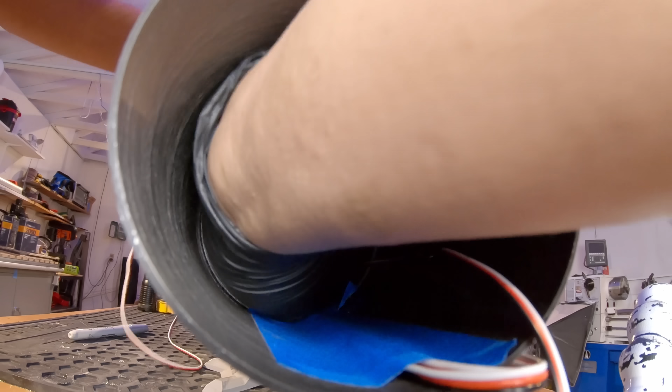In a lot of this testing, I'm leaving the motor case on the inside of the rocket just to make sure I understand where everything is going to sit, and you can see the forward section of it in this shot. Just for total clarity, there's no motor in this, no rocket propellant on the inside.

You don't do that until right before the launch. Just like before, the leads get tacked down with a little bit of CA, and I use some accelerant to speed up the process, and then it's time to finally run the raceways. Getting the leads to be fairly straight was a little bit of a tricky process, especially at the joint between the two extension sections.

It's hard to get that slack to all line up when each of the three lines becomes taut. Just like in the earlier testing, I'm using Loctite E120HP with about 20% Cab-O-Sil to thicken it up. Initially I was going to make these raceways with yellow epoxy, so I added a ton of dye in there, and then it did this really weird thing after vacuuming - it seemed like the dye was starting to separate out from the epoxy, and I got really wigged out by this. The raceways aren't structural, they aren't critical to the structure of the rocket itself, but I don't want to be putting epoxy on the rocket that's filled with some type of oil or thing that's going to separate out. So even though this epoxy is kind of expensive, I took the hard decision of ditching the yellow epoxy.

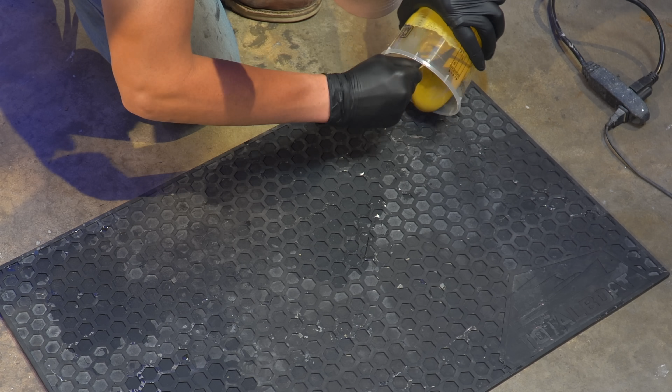One thing you can do is that if you have an epoxy mat like this and it gets really dusty or has paint chips or whatever, you can just slather the epoxy on it and then wait for it to cure and pull it off, and it makes this really cool hexagon shape. I'm not sponsored by Total Boat, but I got the mat from Zyla and she gave me that little tip.

I don't mean to toot my own horn super hard, but pouring this raceway was one of the most satisfying things I've ever done. It was a little harder to get a smooth surface toward the fin, and I think this is just going to take some sanding later on. Just like on the tests, I waited about an hour before I pulled the actual raceway shape using a much larger tool that I designed.

The final result was not amazing. There was a lot of excess epoxy that ended up on the side of the booster, and I realized a little too late that it was pretty easy to lose track of where the PWM cable was within the raceway, which meant that it was easy to run the raceway a little offset from the cables themselves, leaving them fairly unprotected. So it took a couple of tries to get this right, and in the future it seems like it'd be way easier to just fiberglass layup over the cables themselves.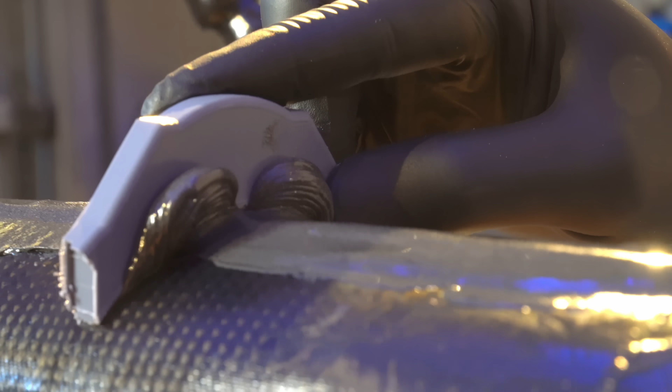On the second raceway, I used a little bit of black dye in the epoxy, and although it was satisfying and looked cooler, it was harder to index against the PWM cables - the problem of earlier, forgetting where the PWM cables are located within the raceway itself, gets harder when you add black dye. I did my best to clean up the excess epoxy around the raceway, but there wasn't a ton that I could do to remove it. At this point, I've made peace with the idea that there's going to be a lot of sanding in my future, and there's very little I can do to avoid that.

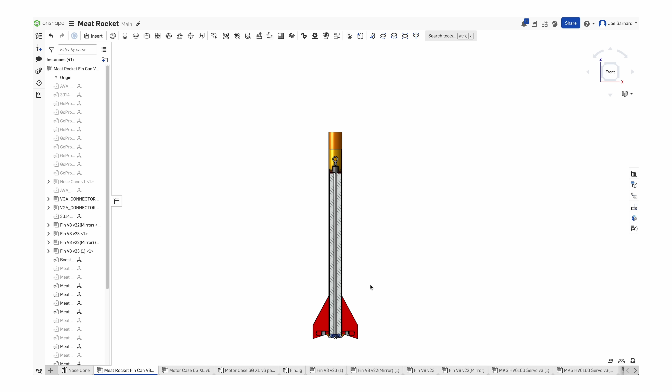Moving on, there's this thing that happens when a project takes long enough where you begin to overthink anything that you are able to overthink. The way that this manifested for me is that I started to become concerned about the unstiffened section at the upper part of this tube. We had already stiffened the section forward of the forward closure, and the very top of the tube should be stiffened by the coupler that will sit within it. But I was starting to get concerned about the integrity of the tube itself up there, and it felt like very little effort to add just another layup, so that's what I did. I bond prepped the surface, and then I cut out some more carbon fiber weave.

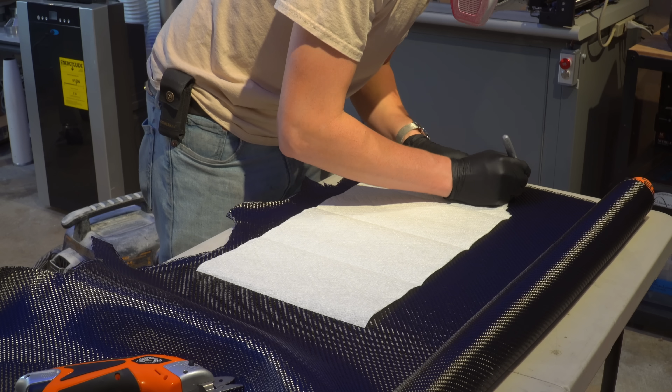I also cut out some 2-ounce fiberglass so that we wouldn't have to sand the final surface and it could be pretty smooth on its own. Then I infused that expired epoxy into the carbon fiber weave. One benefit of doing this layup after the raceway is that the carbon fiber ended up covering the leading edge of where the raceway pops into the airframe, adding a little bit of protection on that servo cable inflection point.

Once all the layers had been laid up, I waited a few hours for the epoxy to become tacky, and then I cut the edge off with a knife. The actual thickness change here, especially aerodynamically, is almost nothing. In my opinion, the added structural integrity makes me sleep a lot easier at night, knowing that's probably not how this is going to fail. If it fails, it'll probably be something else.

We will not have a structural failure. One more time: we will not have a structural failure. The haters said I couldn't do it. I'm going to try to make sure they're not right. But if they are, it won't be structures.

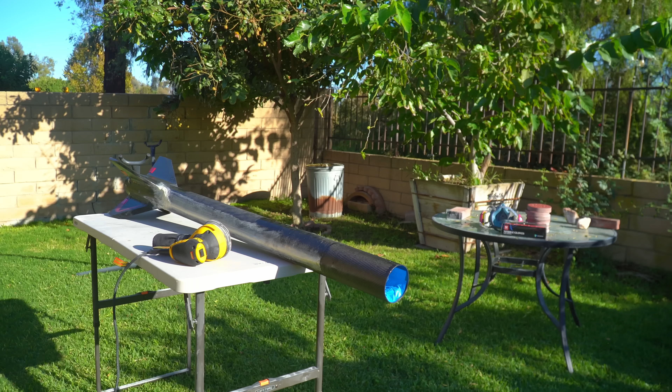As I mentioned earlier, I knew I would have a lot of sanding in my future, and as it so happens, the future has arrived. I'm doing all of this sanding outside because of how much dust it creates, but I'm also wearing a respirator, safety goggles, and gloves. An orbital sander with 120 grit sandpaper ended up working pretty well for most of this stuff.

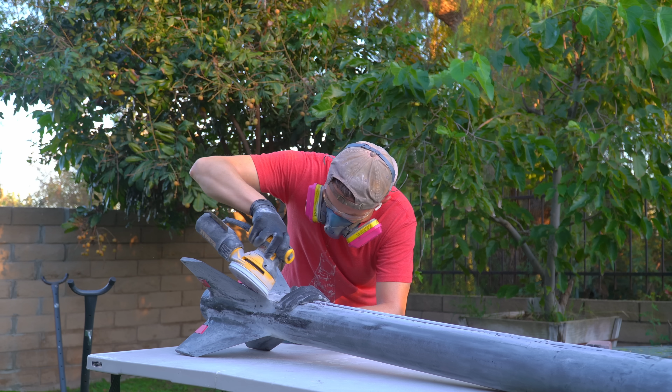My primary focus was on smoothing out any bumpy transitions, specifically the transition into and out of the raceway, transitions between the layups, and all of that bumpy epoxy that ended up on the surface of the fins. I said it before and I'll say it again, I wish I had done this with laminating epoxy. It was the wrong tool for the wrong job to use structural epoxy for this, but what are you gonna do? I guess you're gonna learn from it.

With the sanding done, the booster looks no different, but it'll become apparent once we put a coat of paint on that it's much smoother than before. Before that coat of paint though, we need to add some rail guides.

The meat rocket's gonna launch from a 15-15 rail, which is more accurately described as a 1.5 inch by 1.5 inch T-slot extrusion. I printed the rail guides out on the Prusa XL, which is comically large for the task at hand, and they're made out of PLA Prusament.

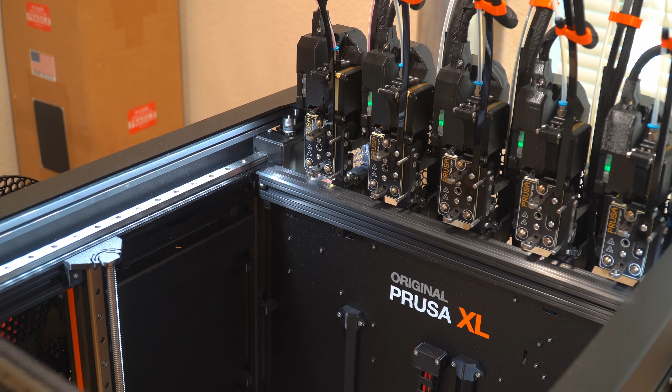You might remember that this rocket is going to Mach 3, and if you're wondering, hey, won't those melt off at Mach 3? You're probably right. They probably will, but from a drag perspective, it's almost better if they melt away, and I don't intend on flying this vehicle a bunch of times, so PLA should work just fine. This could be a video on its own, but I think engineers hyper-optimize for problems that don't actually exist, and this is one of those things.

PLA needs to be strong when it's on the launch pad, and especially because I'm going to be launching in the winter months at FAR, we're not going to see these prints melt on the launch pad. These are getting painted white so they won't thermally absorb a ton of energy, and they melt off in flight, which is kind of good.

Anyway, moving on. As before, as testing goes on, I keep testing the servos to make sure everything is totally functional, and after sanding, everything looked good, which is a little bit surprising because I had a couple of close calls. In this shot, you can see one of the white traces from the PWM cable sticking out because I have sanded into it. The wires inside this cable, like the non-insulation material, is still fine, but the insulation has been eroded away by the orbital sander, so your boy came real close to a problem here.

This actually happened in several spots, and the only cable that seems to have been affected in most of them is the signal cable, which is the only cable that doesn't need to deal with a lot of current, so thank goodness. I mixed up yet another batch of Loctite E120HP epoxy, and I used it to epoxy on the rail guides and do a little repair work on these exposed wires. I also used this opportunity to further coat the leading edges of the fins in that Loctite E120HP. My goal was to seal the surface just a little bit further.

I'm getting more and more concerned about the sharp edges on this rocket as it hits Mach 3, so it can't hurt to have just a little bit of extra epoxy on the tip.

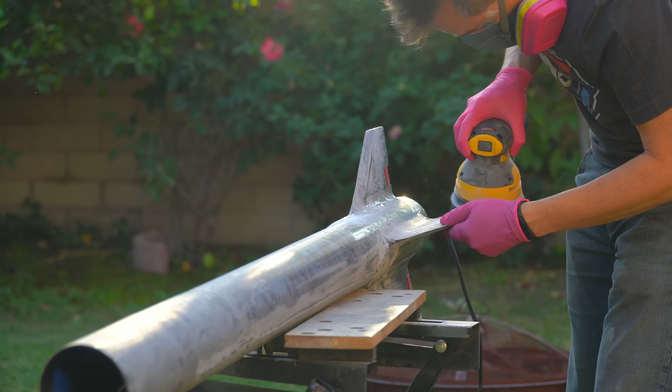To prep this thing for a coat of paint, I brought it back outside for yet more sanding. As shown in this clip, this is why you want to wear a respirator, safety glasses, and gloves to protect yourself as much as possible. All these little particles are sharp and will rip up your lungs if you let them. I primarily focused sanding on the leading edges and the area around the rail guides, and once that was done, I wiped the whole vehicle down with isopropyl alcohol to ensure it was clean and ready for paint.

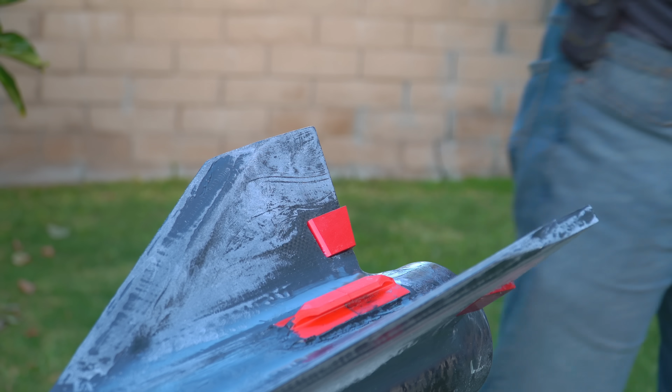I'm using these huge white glossy spray paint cans, and I've had a couple of problems with them before. One thing I've found really helpful in prepping for spray painting is putting them in a bucket of hot water - not boiling, but warm enough for 10 or 15 minutes - to make sure you can get the paint inside as flowy as possible. Especially if the spray paint spends time in a cold climate or it's winter, it helps to warm it up a little.

Before painting, I also taped over the red anodized control tabs. I spent money to get these anodized, so I want to preserve the color. I also prepared a witness sheet, a piece of cardboard that gets spray painted at the same time as the rocket, so if I want to add extra coats or change colors, I can test paint compatibility on this sheet before putting it on the rocket.

The best tip I can give you for spray painting is to go in light, short passes. It's very easy to overcoat and end up with drips in your spray paint, so going slowly and being patient during the process is important.

This is not the final product or the final paint scheme, but rather a base coat, and it's going to be a stopping point for today. The white rocket with these red tabs looks excellent, but it's going to look even better with the full paint scheme, which is much more detailed.

I'm actually kind of excited to see how much this paint scheme gets damaged from what's referred to as Mach rash in the hobby community - that's where your rocket goes so fast that the paint actually begins stripping off. But the build looks a lot better with a single coat of white paint than it did with all those mismatched colors of epoxy.

Looking at this in the sunlight, there are lots of things I wish I had done differently, but that's why I build things, and that's kind of why I put them online too. If you look at this build and think, wow, I can't believe he did it that way - great. Go try something different and put it online so everyone else can learn from you.

For instance, this raceway should have just been a layer of fiberglass. These fins should have been sealed with laminating epoxy. And I wish I had done a little more sanding at the aft to make these surfaces less rough. But overall, I'm really excited to get this thing in the air.